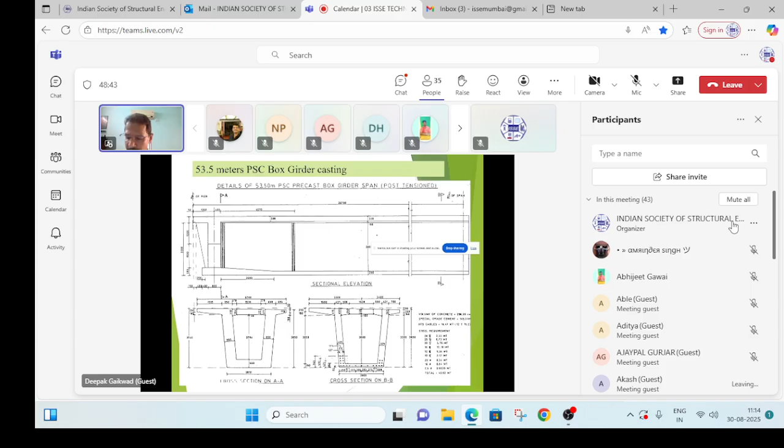This was a challenge at that point in time, casting these pre-stressed precast girders, because just a few years earlier one of the bridges at Panjim in the Mandovi River had collapsed, and the reason understood was corrosion of the pre-stressing strand. So a lot of emphasis was given to controlling the quality of the concrete as well as during the pre-stressing and grouting. Lots of precautions were taken, and we really did work very well.

If you can see this photograph, this is how it looks. We had basically two beds. One is a casting bed on which we will clean the bed, and with the help of a jig we will put the reinforcement for the bottom and the web portion.

And we had another casting bed where we kept our shutters for cleaning and refurbishment. Then as we complete the bottom reinforcement and web, and place all our sheathing ducts, GI sheathing ducts, the inner and outer forms will come onto the casting bed. It will get aligned properly, and then the top reinforcement will be done.

It will be checked properly to the line and level, and then the casting will start. So now you can see how it looks like. You can see one portion here - just a minute, I will take the pointer. This is the casting bed here. The other second bed is for the shutters, basically called a bed for the shutter. And now here all the castings will take place.

Now here we have our batching plant on land, and here at the jetty we have another batching plant. This batching plant here is in a floating condition, which will actually do all the concreting inside the marine. But when we have to concrete this particular full span girder, we'll bring this also, and we'll use both the batching plant CP30, and we'll do this casting.

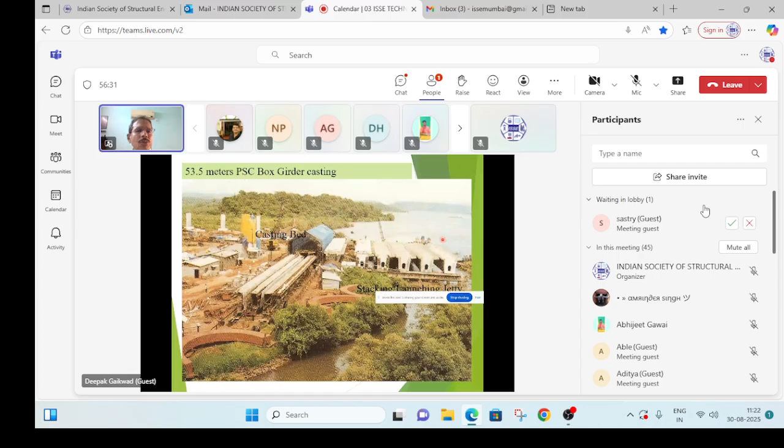So what we have discussed here is the process we basically followed. This is the shutter preparation, cleaning and all that sort of thing, getting it on the shutter preparation bed. This will happen, and the casting will happen on the casting bed too.

Then the bottom slab reinforcement and web reinforcement will be tied up. This is what I already explained to you. Then the shutter shifting, top reinforcement, putting sheathing and all, and doing the concreting.

So there were two CP30 plants we used to take. It used to take almost 20 hours to do the 300 cube concrete. Now I will just brief you and compare at that point of time.

But now at the Bullet Train project, we are casting 40-meter long full span box girder precast post tension. These girders, we now do 400 cubic meters in 6 hours. So this is the drastic change you can see that has happened. Now the speed and pace of construction is really tremendous.

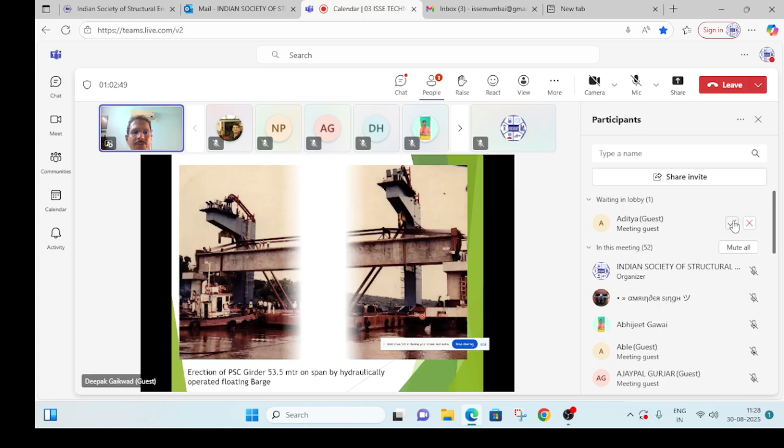See here, the Sahyadri barge will come inside, and this is what you can see is the Sahyadri barge. This is only specifically used for the 53.5 meter pre-stressed concrete girders. Now you can see there are two barges, as I told.

In between, it is connected with the lattice, and these are the two arms having four hydraulic jacks each. There's a chain arrangement, double chain arrangement for lifting. This is the temporary stressing.

What you can see now, this has brought this full span box girder in between the span, lifted, and then it has lowered it on the bearing pedestal, on the elastomeric bearing.

This is how the whole operation used to happen, and a lot of careful calculations we needed to do for the tide, the current, and the wind velocity, etc. By looking at all these aspects, we used to plan our erection works for each span.

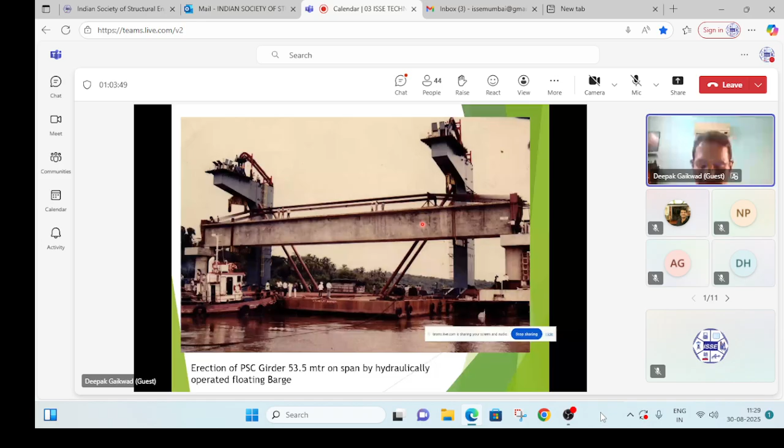This particular activity was done because the casting was done at Zuari Bridge only, the casting yard. But a few of the full span girders needed to be transported to Mandovi, which was at Old Goa. So this is the way it got transported through a sea channel.

It used to come from Miramar beach, from Zuari, got turned from Panjim, go towards Old Goa, and then the box girder would be erected on the ready spot.

But this complete activity was also very critical, transporting this 53.5-meter PSC box girder in a floating barge. So a lot of precautions were taken. Now this was all about the casting of the full span box girder, 53.5 meter, and erection.

Now the second part is we had 22.8 meter T girders. In these T girders there were huge numbers. So we needed to ensure the production cycle. So to enhance the production cycle, we had to do steam curing.

Now, for the steam curing, the cycle was like this: it was a 48 hour production cycle, totally cycle time, for the casting of each of the T girders, 22.8 meters long. So here we used to do the steam curing.

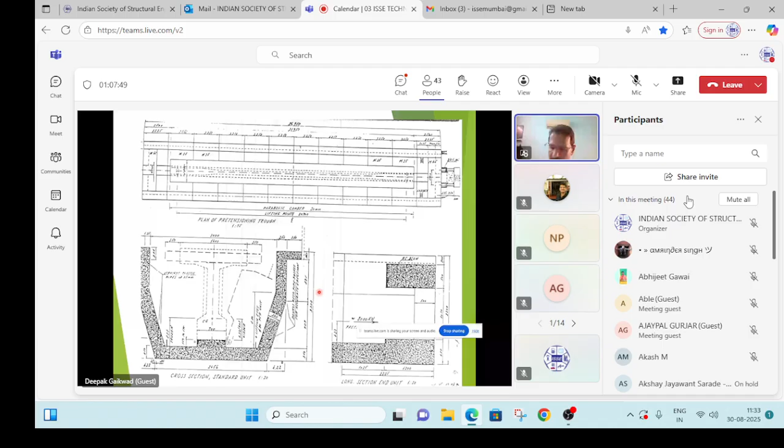This is basically a shuttering arrangement, used at other AFCONS projects also. This is how the complete layout was there for this T-girder casting.

You can see a stack at number one, two, three. There are two troughs we use for the casting - trough one, trough two at the Zuari bridge.

This is how the seaside trolley will work. It is basically on a rail and similar arrangement. There were two trolleys.

These trolleys will come towards the casting yard, casting bed, and then to the stacking bed, where with the help of the gantry, the T-girders will be placed at one particular location.

Then it will be pulled with sliding shoes towards the seaside gantry. It will be lifted, and the gantry will travel to the required span. The T-girder will be placed at one location, and with the sliding arrangement, it will be moved to the extreme end.

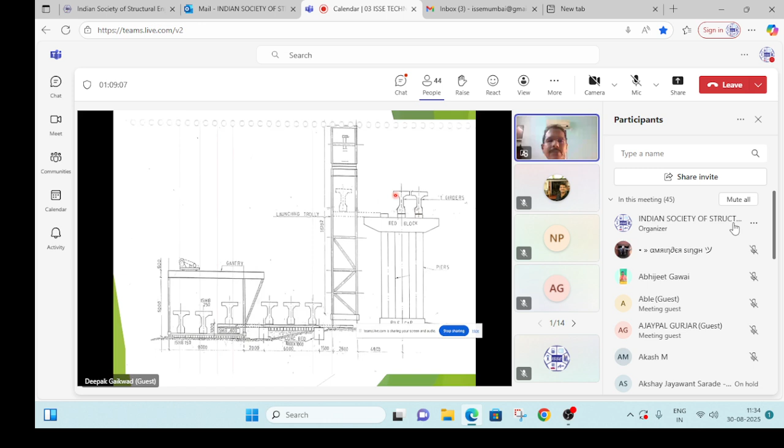Now this was a very challenging work, since this fabrication and assembly was not done by AFCONS - AFCONS only did the erection part with the Sahyadri. So how we did it, we'll see. It was very, very challenging.

At that time, MD Mr. Sreedharan himself witnessed one of the launchings of the steel girder. He was very happy with the way the work was carried out by AFCONS, and he gave appreciation to the entire team of the project.

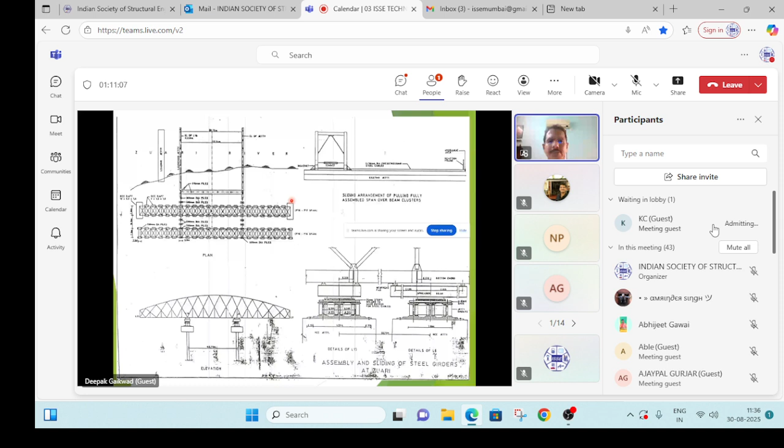So we'll see this - how it is being assembled on shore. This is a 124-meter long steel girder at height at mid location.

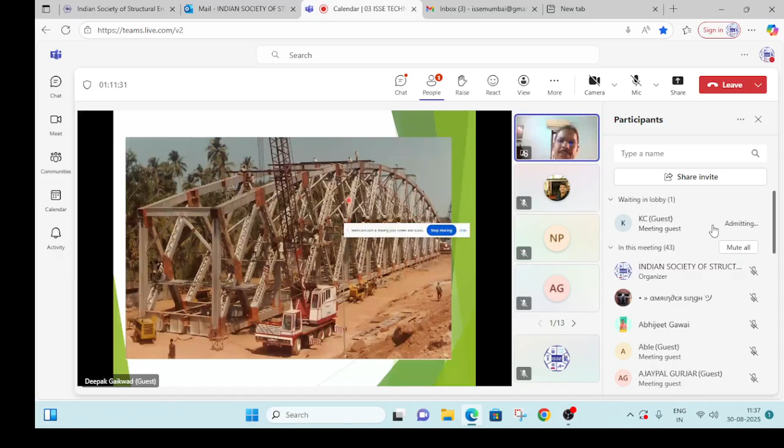The height is 16 meters. Now this is the Sahyadri barge. Basically, earlier we had two towers. Then later on, because this weight is somewhere around 1,000 plus, we had to modify the Sahyadri barge and erect two more towers with the required capacity of jacks and all. Okay, and this was used.

Now this particular one you can see is being used for the 124-meter steel truss girder. Now this barge, you can see, is here in the location.

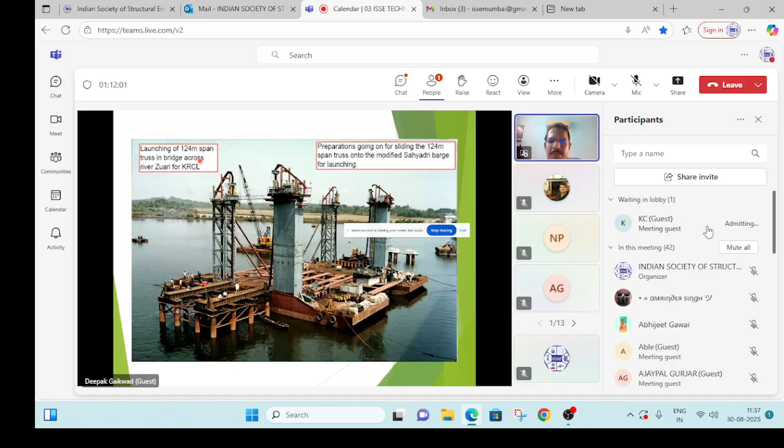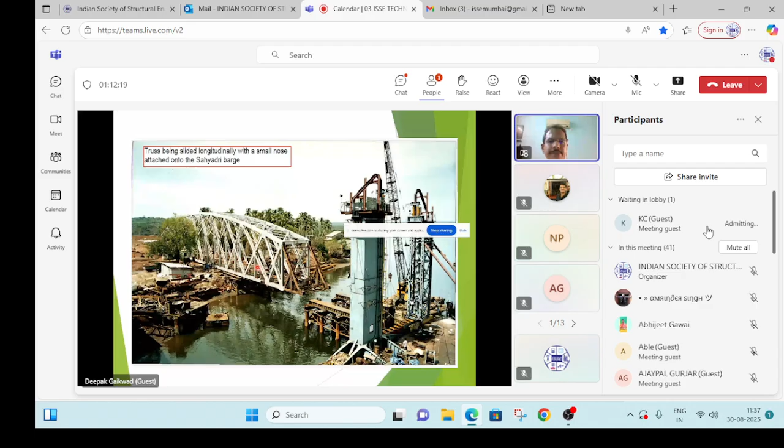Position properly. Now this steel girder is reaching, being pulled towards the Sahyadri barge. It has been assembled here on the shore. Now, with the sliding shoes and all the sliding arrangement, it is being pulled towards the Sahyadri barge. Now the Sahyadri barge is perfectly positioned now.

It is on the barge now. Now we are waiting for the tide to come, and when the high tide comes, it will lift up this particular whole assembly of 124 meters, having a weight of around 1,000 metric tons. Now you can see here, it is in a floating condition. So now this is being towed towards the navigational span.

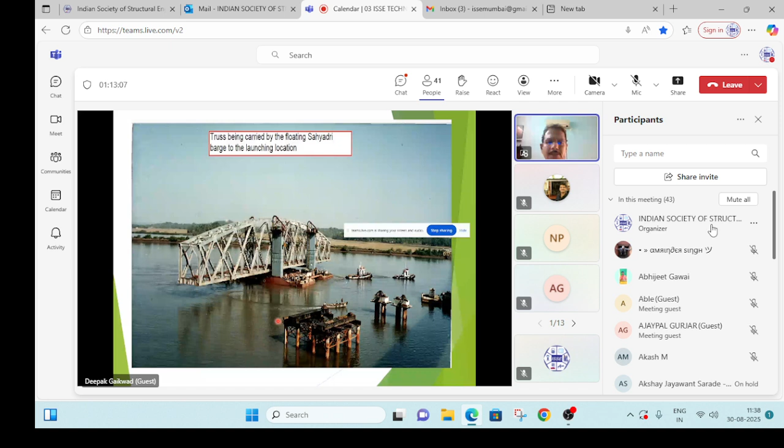Now here what you can see, these are the hand winches here on the pontoon. These are the buoys. On this, it is basically towed to one particular location. Now this is being transported to the required location with the motor tug. It has reached the location, being perfectly positioned.

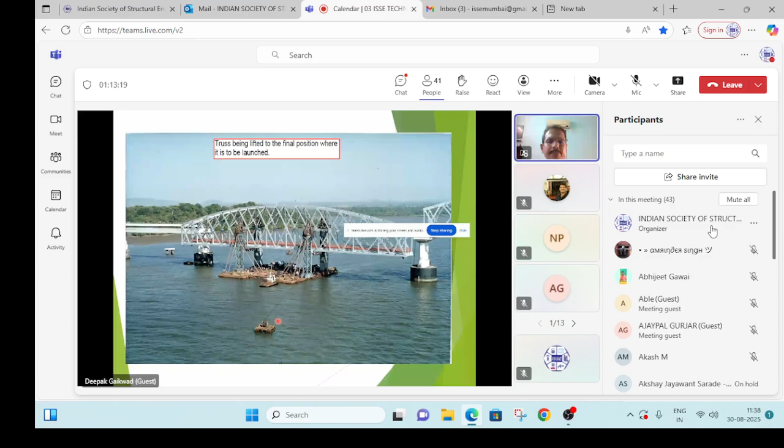And now here you can see it just entering inside. Now the truss is launched at the location and it is in the exact position. Now this is basically the complete picture of the erected span of the two steel girders. This is the two navigational spans of the Zuari bridge.

So the story behind is that a lot of effort was involved in this. A lot of technical people learnt a lot here in this particular project regarding pre-stressing, pre-tension, post-tension, marine piles, pneumatic caissons. We had a lot of ground improvement work using sand drain, band drain, and we used rotary piles there on the land at that time.

So this was everything a new kind of thing for people to learn a lot, including Konkan Railway, AFCONS, and many students from Goa college and other colleges also visited this project and learned a lot. A college from Farmagudi also visited quite frequently, and a lot of visits used to happen at this project from Konkan Railway itself to see the project and learn from it.

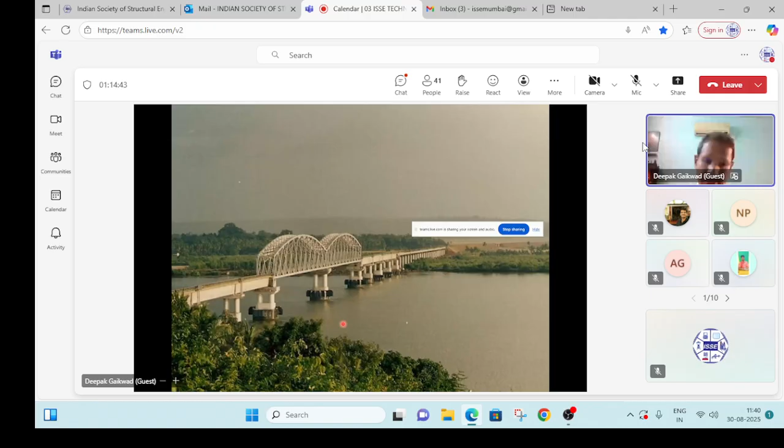Now, when we completed 25 years from this project, all the people from this project, right from Mr. S.D. Limaye, Chief Engineer Design, all the chief engineers like Gupta sir, Dabadkar sir, and many Konkan Railway engineers, though some of them are now at very high positions, they also had come. And our seniors like Kashalkar sir, Mr. Giridhar, Dr. Nayak, N.V. Nayak, all these people came here, and after completing 25 years of this project, we all got together and celebrated very enthusiastically at Navi Mumbai.